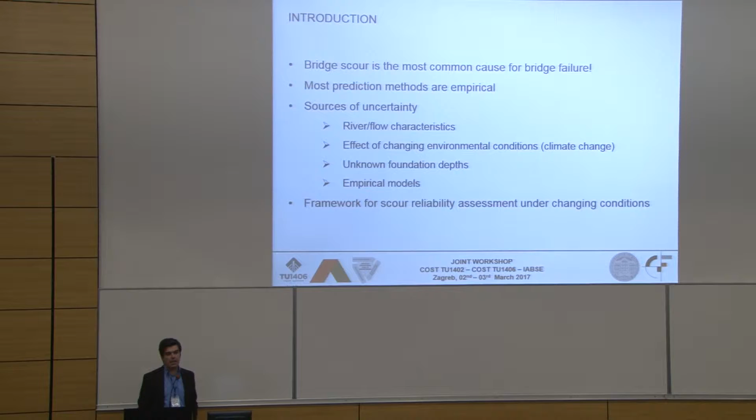One of the biggest challenges is that most prediction methods are empirical, so most of the assessment models for scour have been developed for laboratory conditions, small-scale specimens, and there is an important scale effect. People have shown that they might be inadequate in predicting accurately scour in real-life, real field conditions.

Here I have itemized a number of sources of uncertainty. Considering bridge reliability under scour conditions, sources of uncertainties can be river and flow characteristics, obviously the effect of the changing environmental conditions and climate change, which in itself is uncertain.

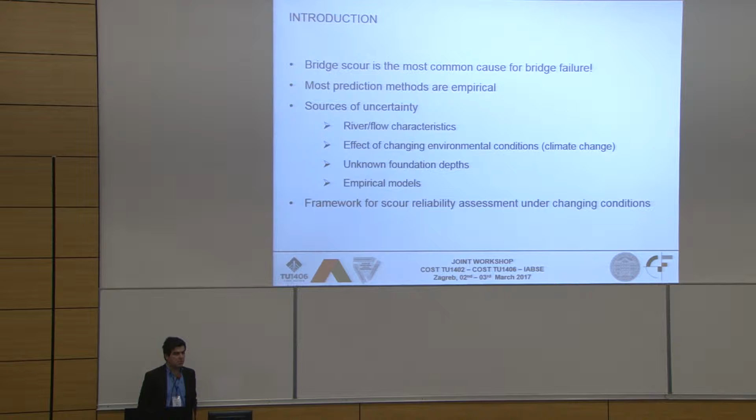Unknown foundation depths - there are still a lot of old bridges which we don't know how much the depth of the foundation is, so that poses again a big uncertainty in the whole problem. And as I mentioned, the use of empirical models.

So what I'm trying to present here is a basic framework for how we can quantify scour reliability and how we can potentially take into account the effect of climate change on scour reliability.

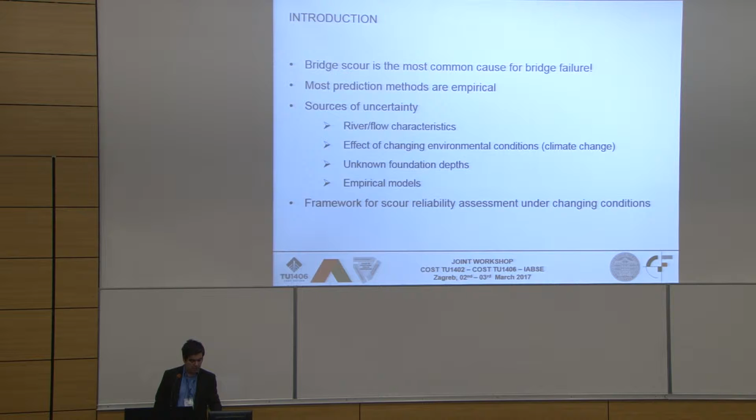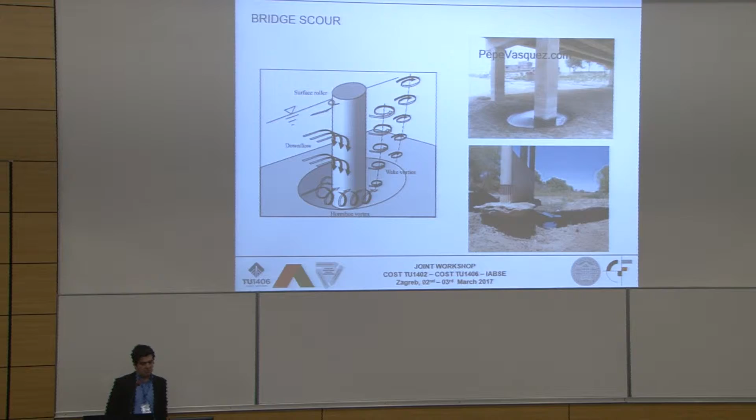A few examples of bridges that have failed due to scour in the past. I will not pause a lot of time here. Bridge scour is obviously the erosion of the local area around the bridge piers, and some photographs about scour here.

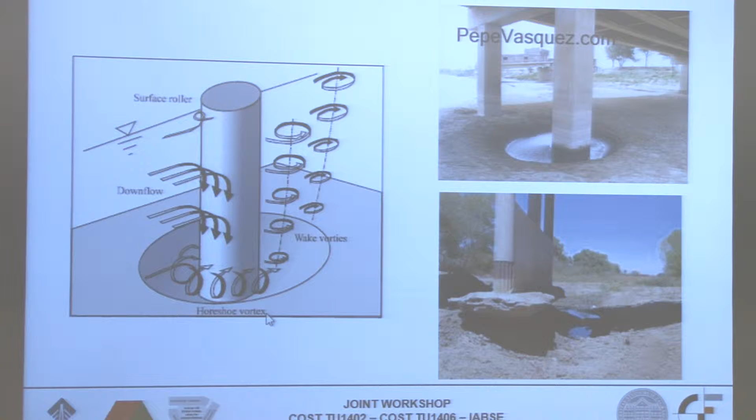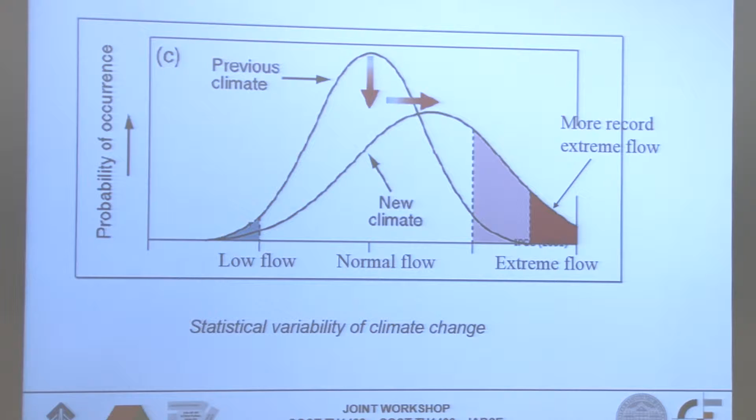The biggest problem of scour is local scour, which tends to concentrate around bridge piers and abutments. This is effectively a figure which was taken by the IPCC report for climate change, which shows effectively how the change in climate might affect extreme events.

So if this is our current climate, this is a distribution of an extreme event. If the distribution changes rightwards through time, as you can see, we are expecting to have more record extreme flows. And obviously, when we are considering scour, we are looking at extreme flow events and how that might affect the stability of the structure.

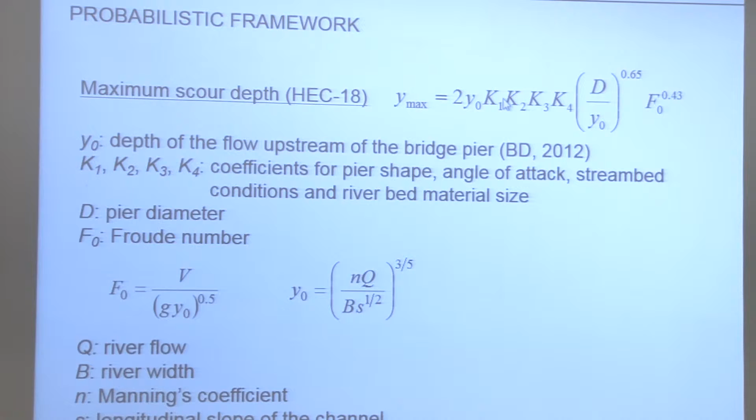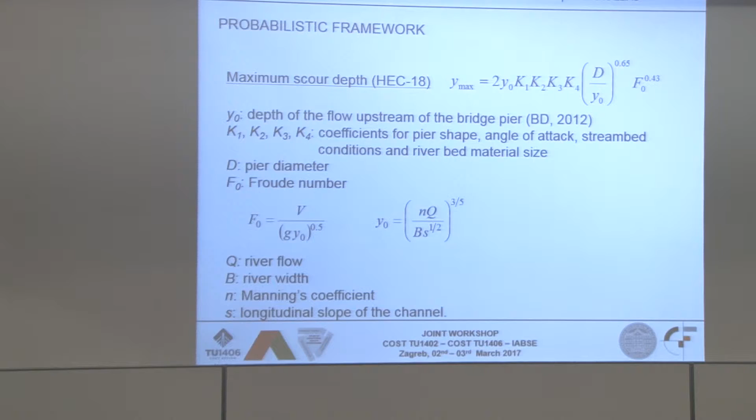The parameters here that are important - there are four parameters that take into account different geometrical aspects of the bridge: the shape of the pier, angle of the path of the water on the pier, stream bed conditions, which relate to whether you have clear water or live bed conditions, and obviously the riverbed material size, which is an important geotechnical parameter for calculating the stability of the pier.

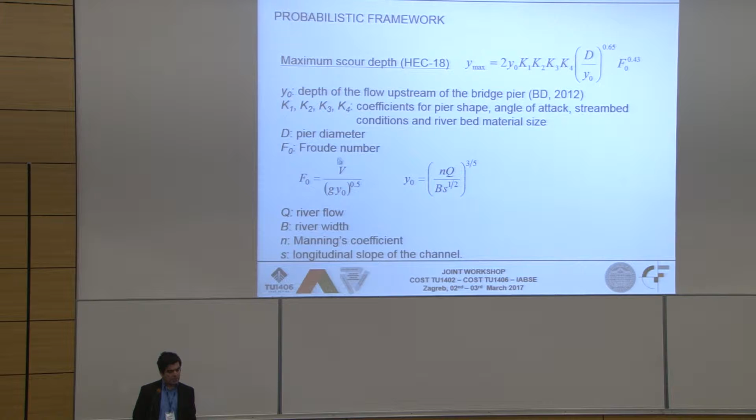The depth of the flow is directly affected by the flow itself. And then you have here the Froude number, which is a hydraulic parameter, which is a function of the velocity.

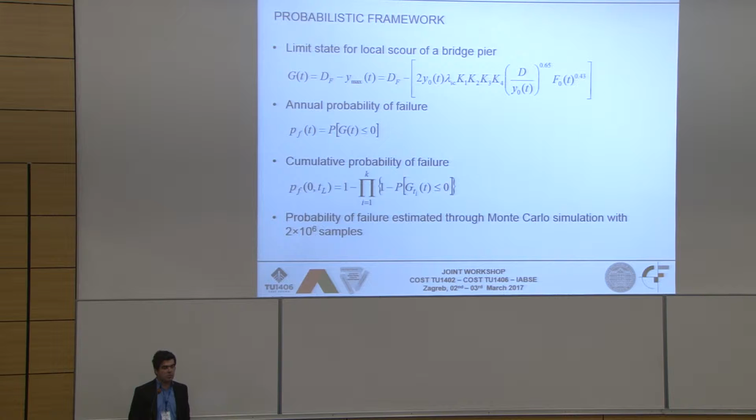And then how we set up the probabilistic framework - you can see the limit state here. We were looking at the limit state of exceedance of the foundation depth at the local pier, so we didn't extend that into the system of the bridge itself; we were looking at it from a component point of view.

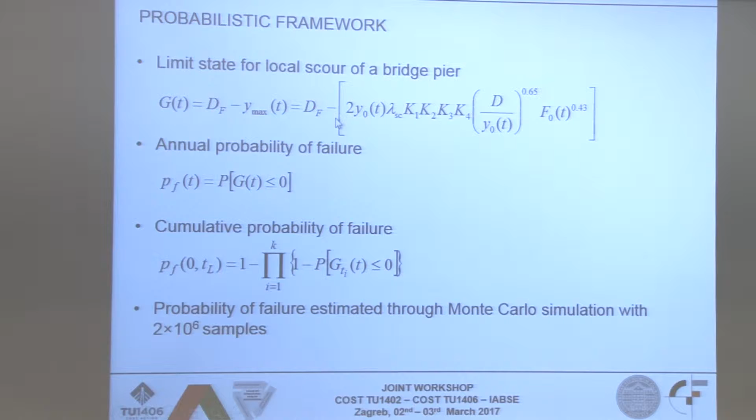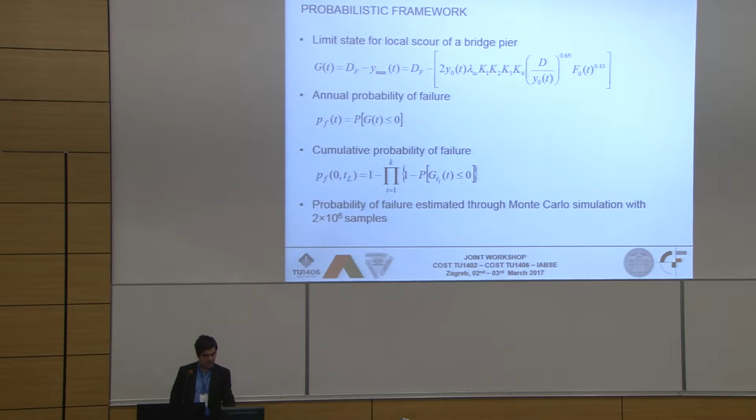Having that limit state, then you can carry out a Monte Carlo analysis to calculate the annual probability of failure, and then aggregating the annual probabilities, you can have a cumulative probability of failure over the lifetime. In Monte Carlo, we calculated it using 2 million samples.

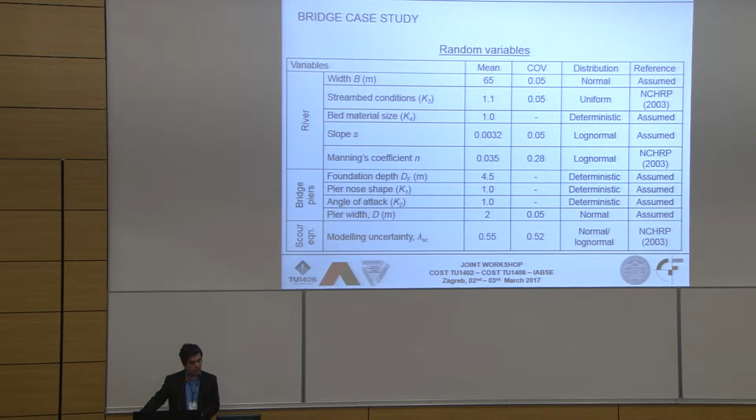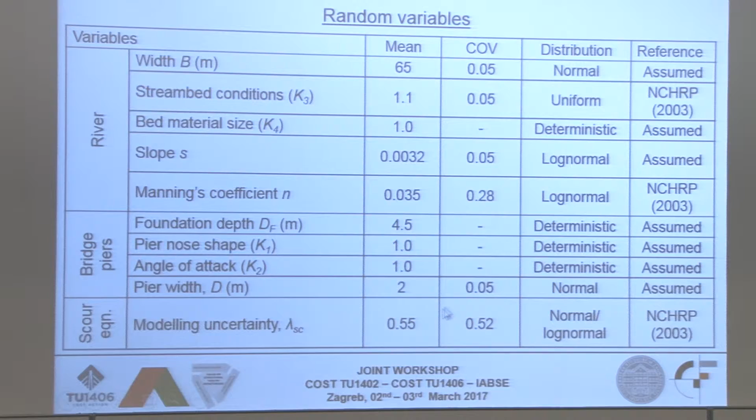And these are the random variables which show what kind of uncertainties we have quantified and taken into account in the analysis. Things like geometrical parameters with small variations, but also more important hydraulic parameters. One parameter I want to focus on is this modeling uncertainty.

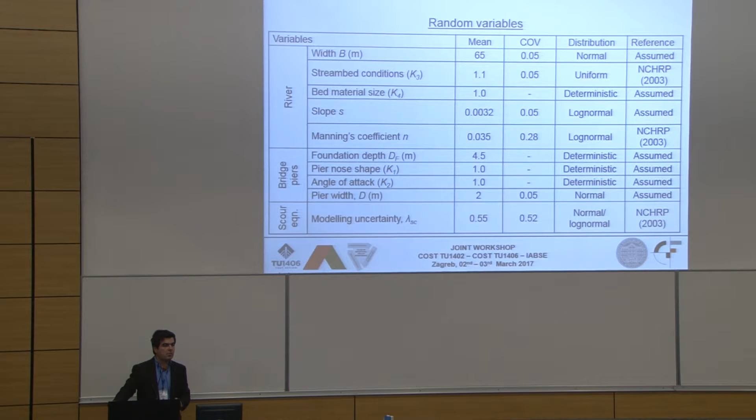So I come back to what I said earlier about the use of empirical models in scour assessments. People have done comparisons of these models with real field measurements of scour, and they have shown that there are great differences in the scour depth predictions given by these theoretical models. The mean value of these comparisons has shown a mean value of 0.55, and note also the very big variability in these comparisons of field measurements with theoretical models.

So how we tackle the problem is to do a parametric study to see how climate change might affect the properties of the distribution of the annual flow, and we base our analysis on the maximum annual flow with a return period of 2 years. That flow is obtained from annual maxima series of the flood estimation handbook, a well-known software in the UK which gives you the flow predictions for all the rivers in the UK.

So doing a statistical analysis, the expected annual flow was shown to best described by the generalized extreme value distribution. What that method effectively does is look at all the historical data of floods and then extrapolate that.

One of the things we assumed to carry out the analysis and simplify it is that flow events in different years are independent of each other. The parametric study to quantify the changing conditions was manifested through changes in the distribution parameters. So if you imagine this is a distribution of the maximum flow, we assumed how a change in the mean, an increase in the mean or an increase in the standard deviation or variability of that distribution, will affect the scour reliability of the bridge pier.

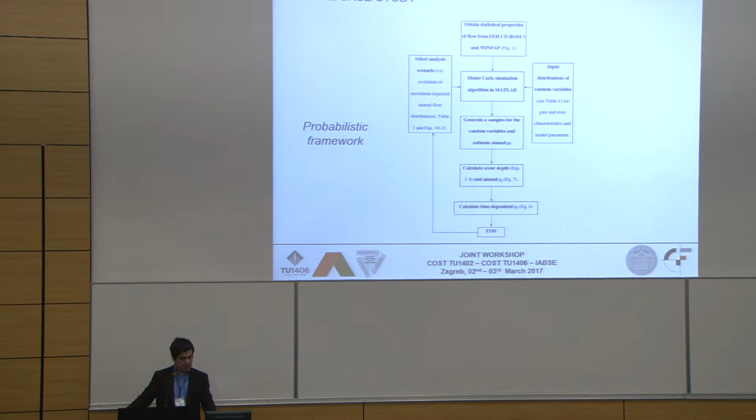So some results here. This shows you the distribution of the maximum annual flow and how that changes with a change in its mean parameters. Here we have assumed that the increases are 20, 40, and 60%.

One of the biggest challenges is effectively determining how much that change will be. In the UK, for example, there have been studies looking at how climate change might affect extreme river flows, and there's a lot of dispute about what that number is. Some rivers are expected to be affected much more, some less than that.

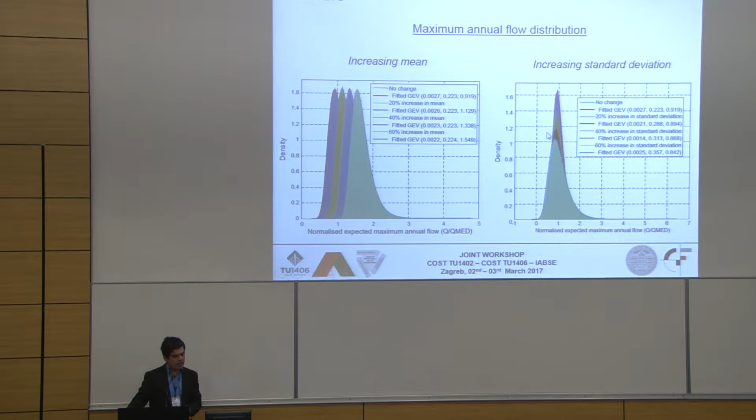And this is an example of how a change in the standard deviation and the variability will affect the distribution. Then using that for the probabilistic analysis, you can get the time evolution of the probability of failure.

So this is a scenario assuming an increasing mean in the distribution of the maximum flow, and this is the case of capturing an increased variability, an increase in the standard deviation of the assumed probability. The analysis was carried out for a time horizon of 60 years, for different increases, and both figures show the annual probabilities as well as the cumulative probabilities of failure.

Obviously it's evident that in the first few years there is a small influence on the probability of failure, but as you move forward into the future, the change in the probability of failure becomes more evident.

We haven't looked at the target probability. Obviously this will depend from structure to structure, so it was out of the scope of our study to define the target probability and compare the probability of failure with that target. These results are for a specific foundation depth of 4.5 meters.

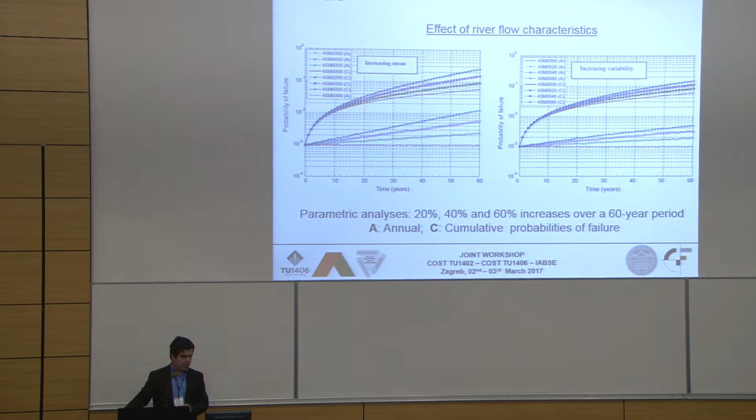We also did an analysis to see how the effect of foundation depth might affect the probability of failure. So this shows you the influence of different foundation depths on the cumulative probability of failure. These are the previous results for a foundation depth of 4.5, and you can see how much the influence is when changing even a smaller foundation depth. So this is a significant parameter that greatly influences the probability of failure and requires attention to more reliably define what the foundation depth is.

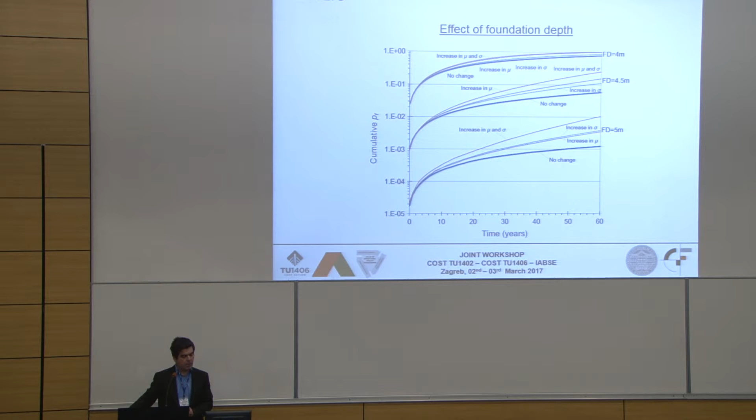Obviously, one of the things we haven't considered in this study is that if you have a foundation depth of 4 meters, you end up having very large probabilities of failure. There is a correlation between foundation depth and river flow—the more river flow you have, the deeper your foundation is expected to be, but we haven't taken that into account. We just held river discharge constant and played with the foundation depths.

This shows a summary of the effect of the scour modeling uncertainty, which is very important. The lower curves show the cumulative probability assuming no modeling uncertainty is taken into account. Here you can see what happens if you consider the modeling uncertainty—again, a big increase in the probability of failure, usually on the order of 1 to 2 magnitudes.

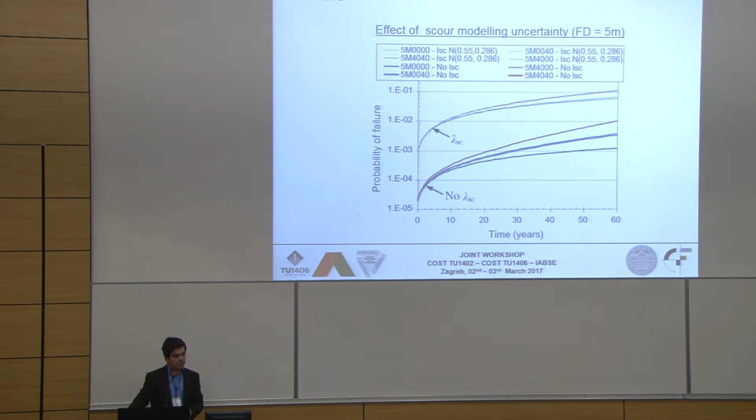The other important observation is that when you start considering the modeling uncertainty, the effect of changes in the variability of the flow itself are overshadowed by that big uncertainty in the modeling parameter, because you have a very big COV of 0.52, which was obtained from comparisons of field measurements of scour with theoretical predictions.

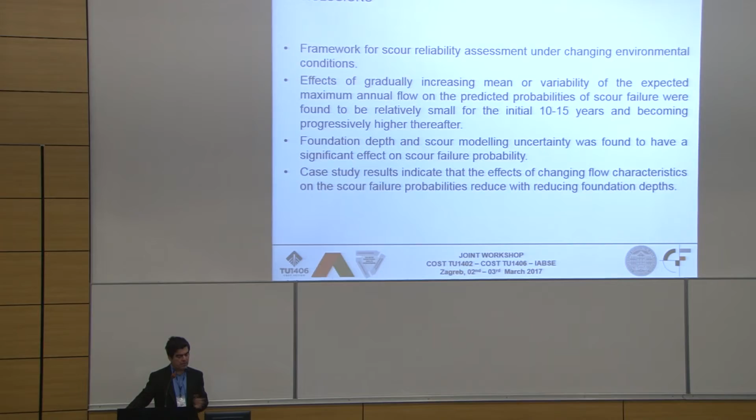So this was a framework to show how you can quantify changing environmental conditions on scour reliability. The results show that initially there isn't much influence on the probability of failure, but as you move forward in the time horizon, changes in probability of failure become more important. Foundation depth and scour modeling uncertainty were found to have significant influence on scour failure probability, showing the importance of accurately determining these parameters, especially foundation depth, considering we don't have records of foundation type or depth for many bridges.

As I said, the case study we carried out on a real bridge showed that the effects of changing flow characteristics reduce with reducing foundation depth. So effectively, the lower the foundation depth of a bridge, the less the impact of climate change is expected to be.

And with that, I conclude my presentation. I'm happy to answer any questions.

Thank you very much for this interesting presentation. I have one question in regard to the uncertainty of the future development of the flow properties.

So did you try to—this is a kind of parameter uncertainty, right? You don't know exactly how the mean value and standard deviation of this extreme value distribution will develop. Have you tried to integrate this parameter uncertainty into the reliability analysis to get a predictive curve of the development of the probability of failure over time?